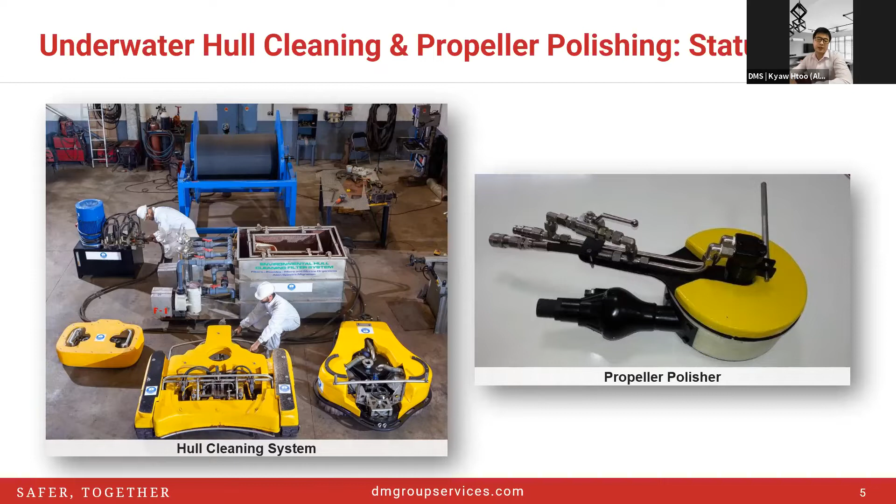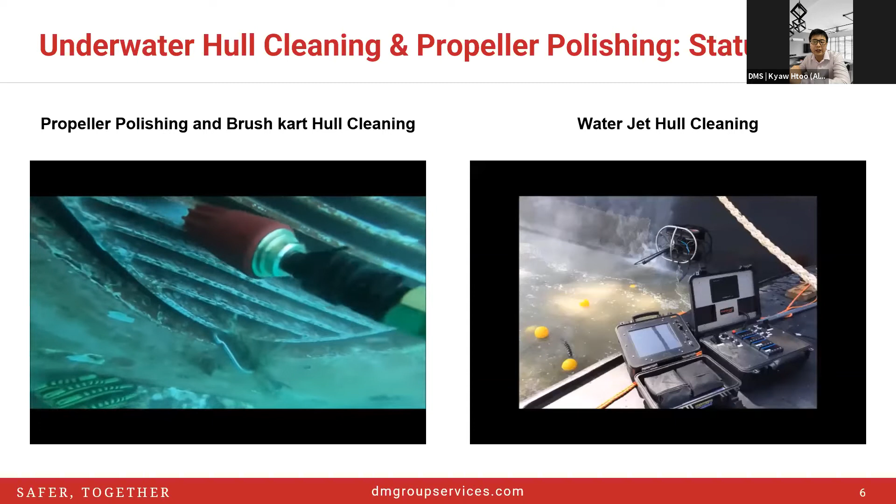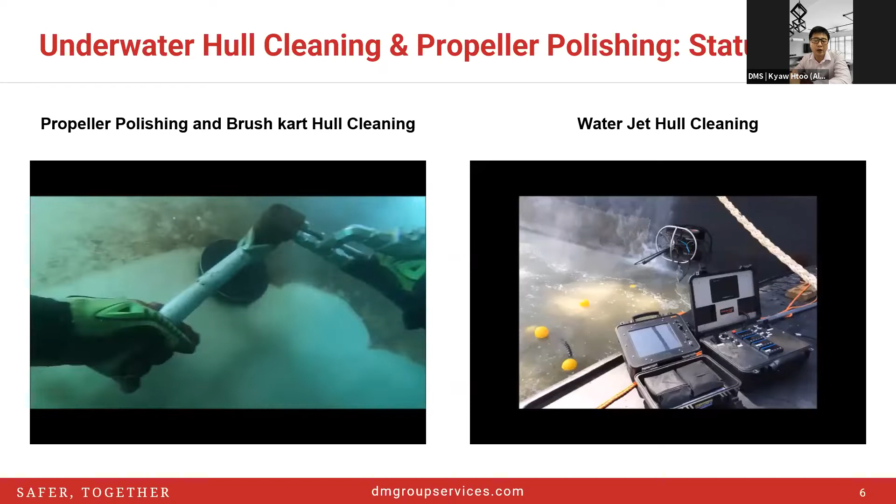This is another area where the cooling line passes through to the ships. The next step shows the actual operation for propeller polishing using the polishers by a human diver at this stage.

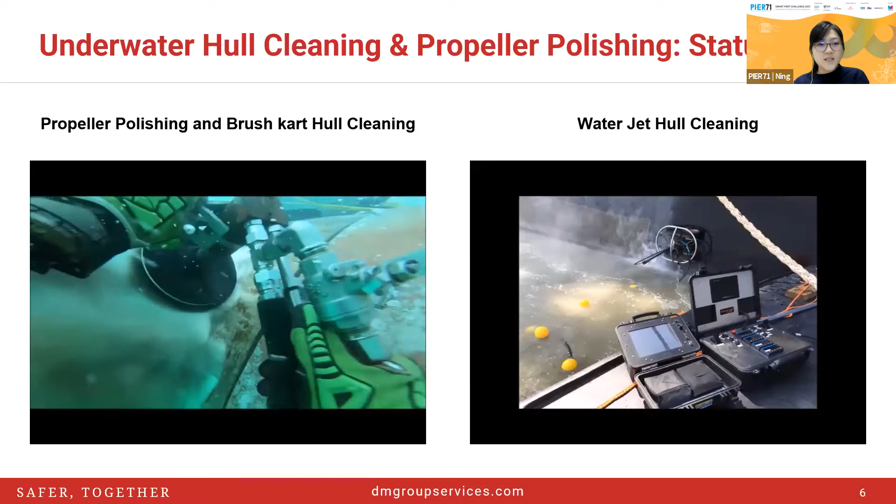We can see that it's very manual currently, right? Yes, exactly, and they need human control. With human divers, there comes precision—they can go through places and know exactly which spots to clean, and also know exactly not to damage the propellers or the hull itself. Different pressure can cause different effects, so we are only cleaning and polishing to ensure the best performance, without damaging any machinery, equipment, or the hull itself. It's a very careful and tedious operation.

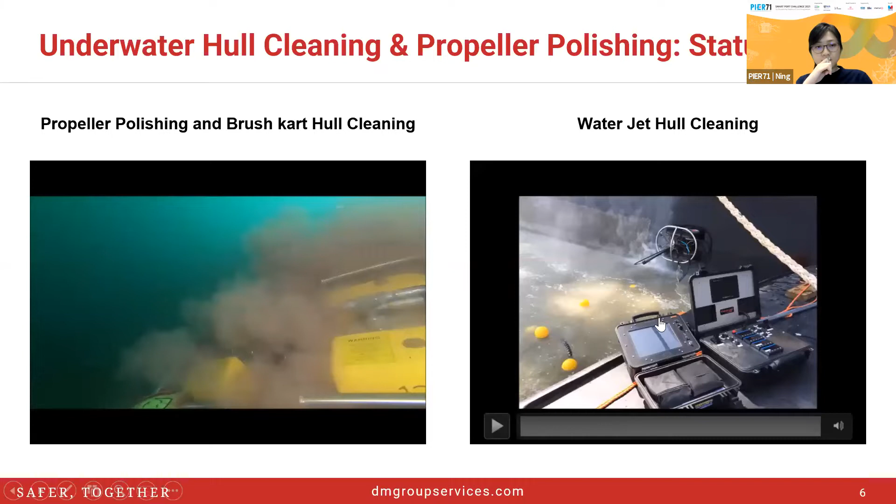The next is the brush kart, also run by divers moving through the hull. On the right, there's another type of technology using water jets for hull cleaning. So on the left is the brush kart system, and on the right is the water jet system.

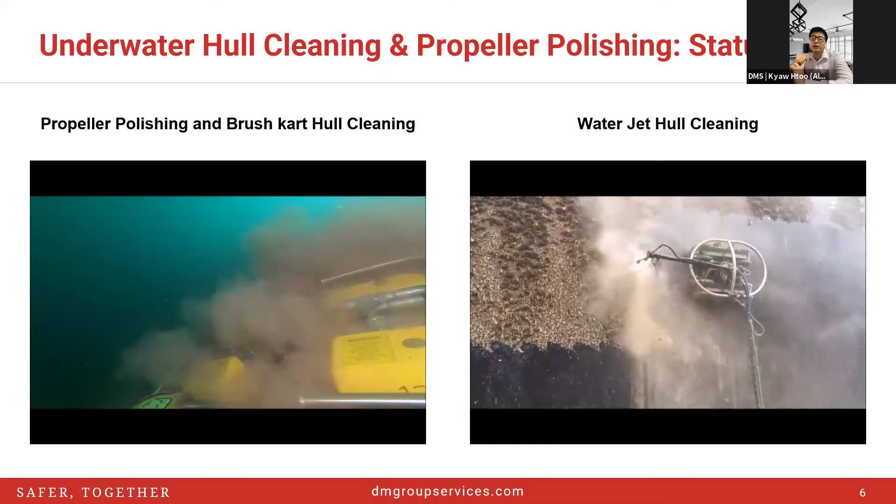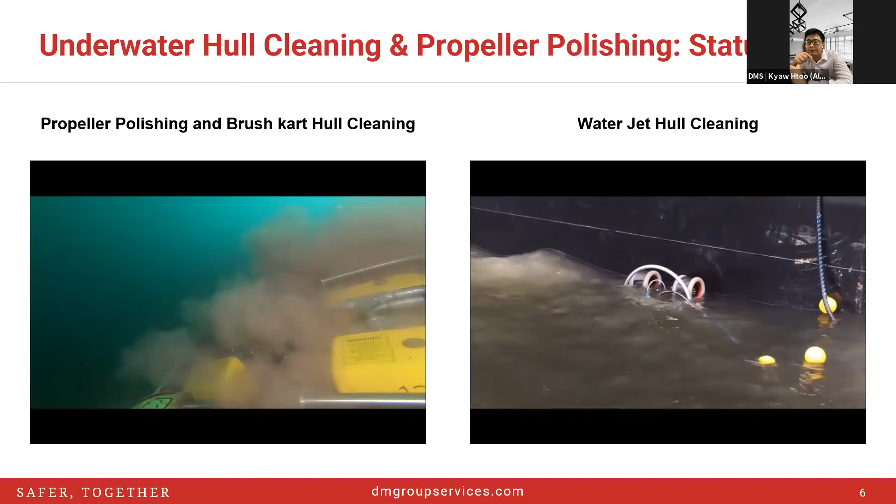This is not operated by a human, is it? This is an ROV, definitely operated by a human on the boats—remotely. There's no full automation where everybody sits in the office and the robot does it by itself at this stage. But at least the good thing about the water jet system on the right is there's no human diver involved throughout the operation; mostly he just lowers the equipment to the right place, then the pilot does the job of cleaning.

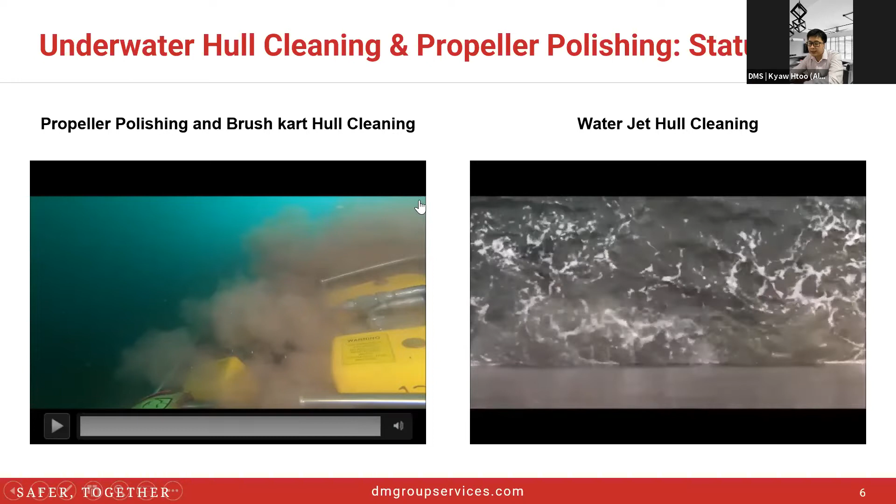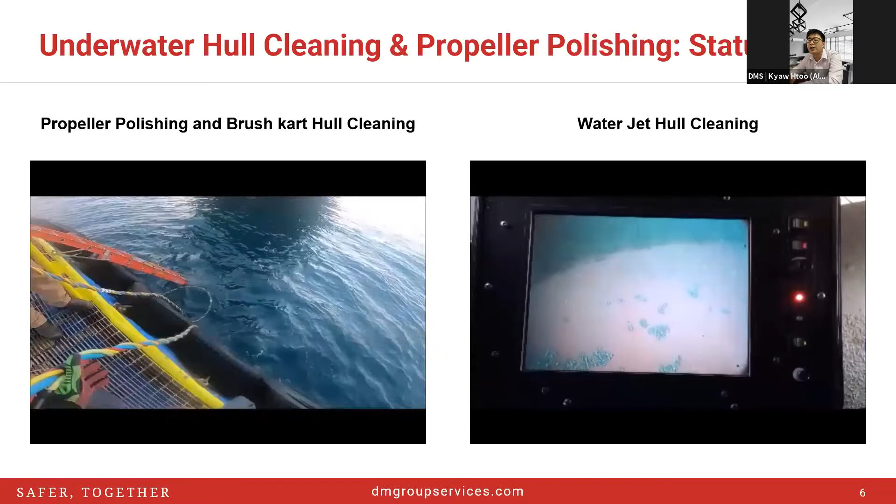I think we can move on to the next slide. After cleaning, what actually happens is that while cleaning you cannot see the proper condition of the hull. So let's go on to the next slide.

A typical challenge we've been facing is mainly those hard to reach areas that Ning mentioned previously, the bow, the stern, and all the propeller and rudder area. This is the tedious part. And of course, different fouling has different conditions, so time to time the barnacles are very hard and difficult to clean. It's also dependent on which kind of tool and brush to use for different cleaning projects.

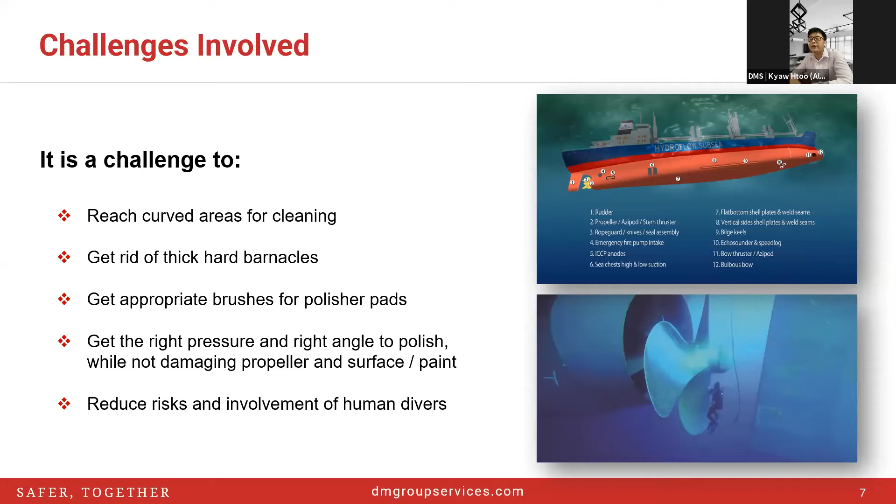Not only that, all this area, we want the best performance of the hull and propeller. The important factor we're considering for all this ROV solution is also because we would like to reduce risk and involvement of human divers, as it is a very high risk operation. So this is the current challenges we face.

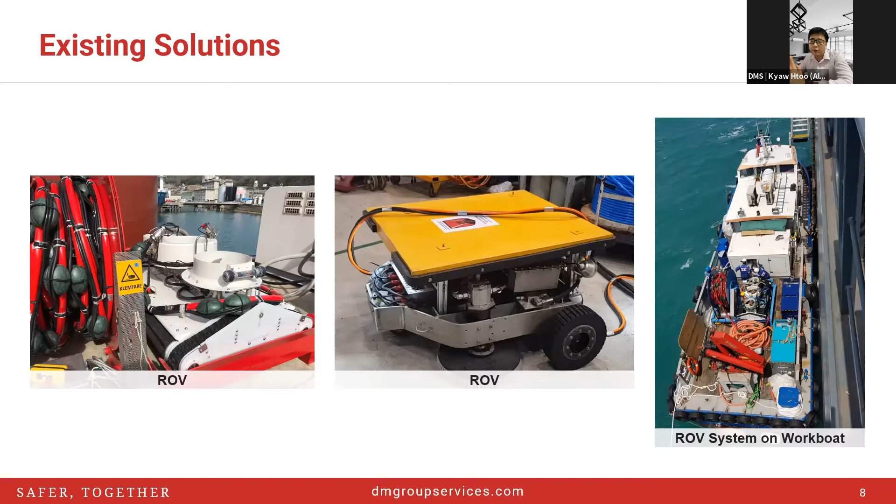Then, of course, there are existing solutions at this stage. On the left-hand side is a water jet ROV system, doing the cleaning with only the pilot operator remotely operating the vehicle. The center one is the brush kart system, also remotely operated. On the right-hand side is a full setup ROV system on a workboat. Now I'd like to move on to show you some videos on how actual cleaning is being done by the ROV.

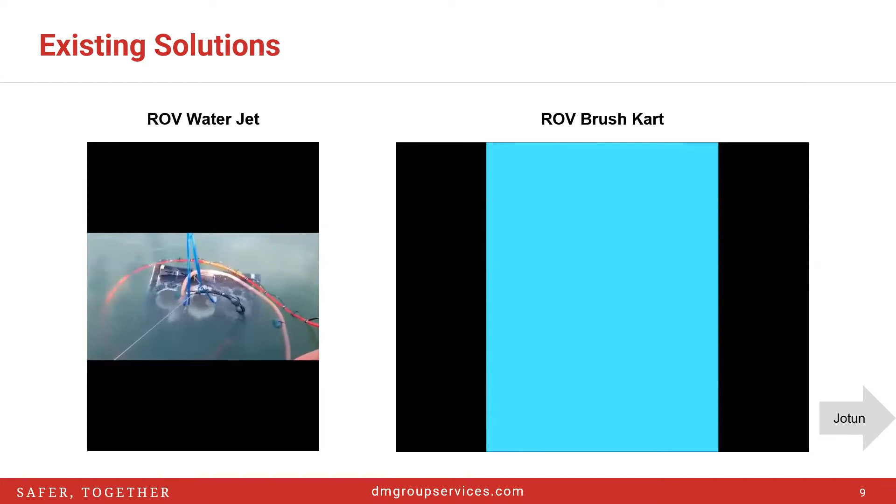I have a question. All these are underwater, right? Yes, these cleaning are underwater, nothing above water. So whatever you're showing is effective only when used for cleaning below the water surface, right?

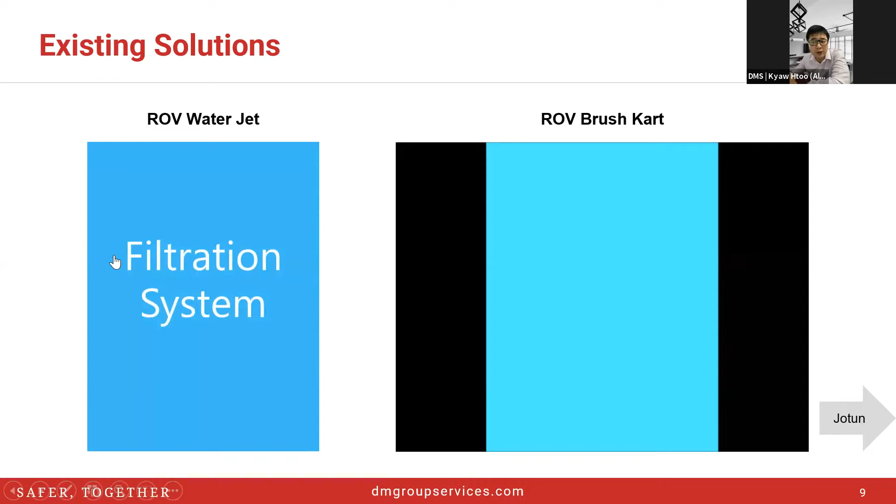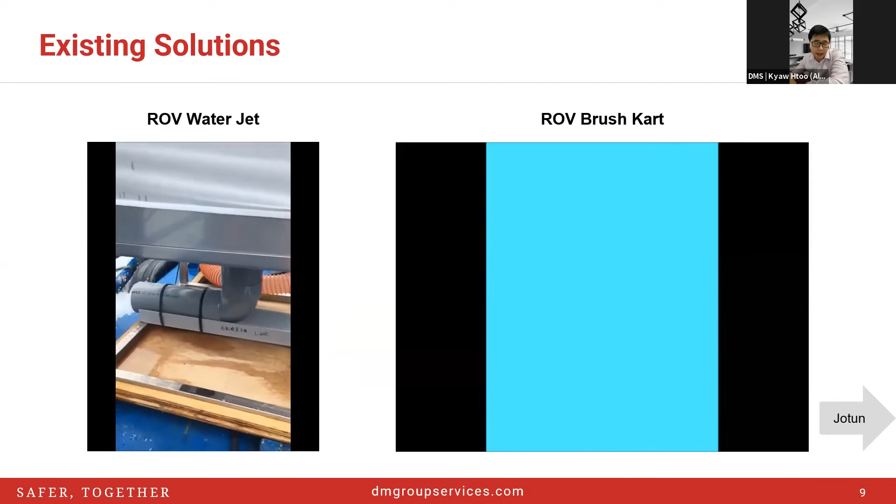Yes. But of course, there are different tools and ROV systems. Some make use of magnetic systems so they can stick onto the above waterline, so that's also not much of an issue. Other than that, above the waterline, you can even use a normal hydrojetting machine from the ship side to do the cleaning. So above waterline is normal.

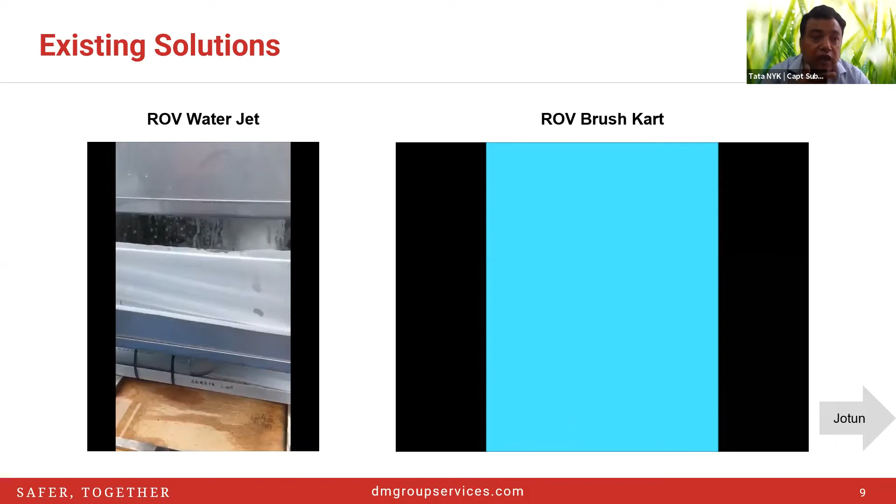So normally, what are the difficulties? If the vessel is in loaded condition, then most of the underwater surface below is cleaned. But if the vessel is in ballast, they've got a high freeboard of 8 or 9 meters, so the equipment is unable to reach that height. Maybe only 1 or 2 meters of the water level they clean. So in fact you're carrying out hull cleaning which is not 100% efficient. That is one area of concern.

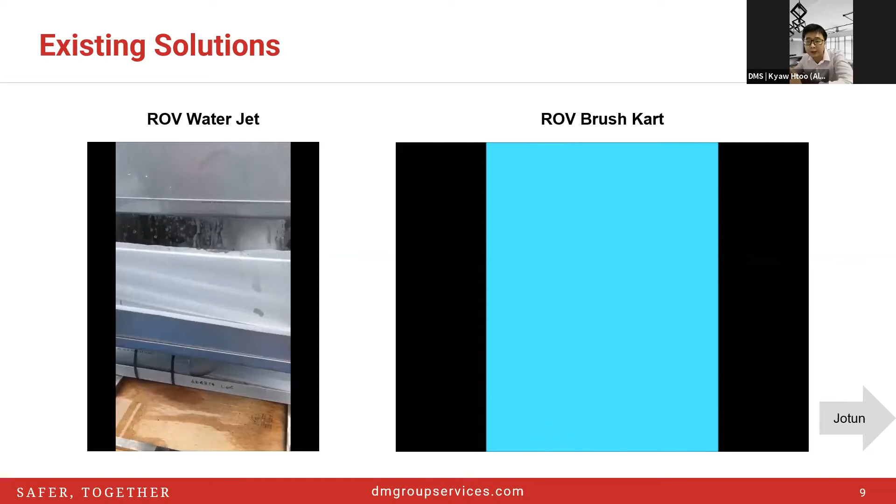For that reason, there are also workboats equipped, because this depends on the draft condition and arrangement done on the vessel at that particular point in time during hull cleaning. If you pre-highlight to the diving service company the draft, how many meters above waterline and how many below, they can arrange a different team to take care of different jobs. Above waterline can be done many ways, a simple way is a workboat alongside using the hydrojetting machine, or manually with an ROV machine. But those ROV systems with a magnetic system can go vertical and also do the job. So all this needs to be pre-communicated so that during the hull cleaning process you can optimize the cleaning area.

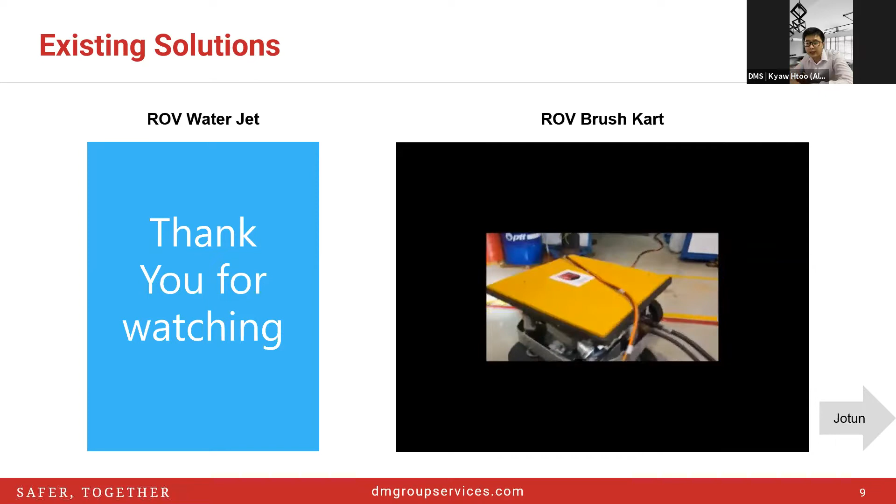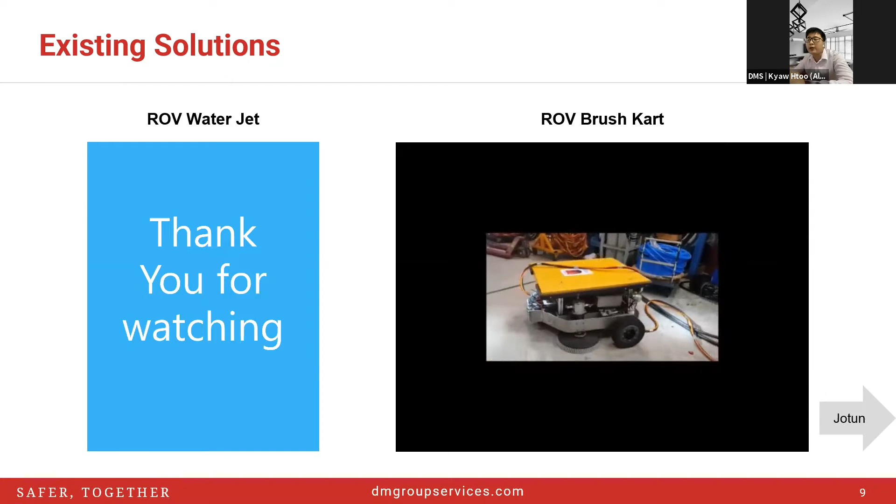This is a debris collection system where they filter all the barnacles and then discharge the seawater. On the right-hand side is another type of brush kart system using the ROV as well, remotely operated. This is only in the workshop where they are doing a trial; later the video will show the actual operation.

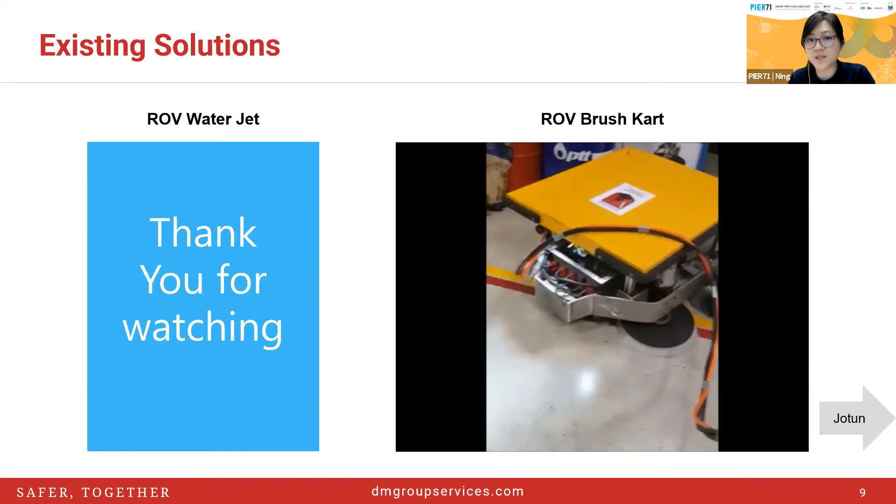But all these can only be used on flat surfaces and not really on curved surfaces, right? Yes, exactly. As you can see, the structure is quite big, so the limitation is they can only go through curved surfaces at an angle, but cannot really clean thoroughly on curved surfaces, especially like the propeller. Yeah, the propeller is a very tedious operation, so definitely this huge giant system cannot clean the propeller at this stage. We need something smaller, compact, to reduce the tediousness of propeller polishing.

Propeller polishing is something that, although the propeller itself is not as fragile as we think, it's a part you do not want to damage. So does it actually get damaged very easily? No.

If you're using a very hard brush, it can cause scratches. What superintendents don't want is any crack or damage to the propeller, because all this is subject to class survey usually every 2.5 and 5 years for a vessel.

So at 2.5 years, normally they do the in-water UWILD inspection, we call it in-water survey inspection. If the surveyor finds any damage, especially cracks or anything, they will flag the issue. It's quite major because the propeller is also part of the major component for fuel consumption and fuel efficiency.

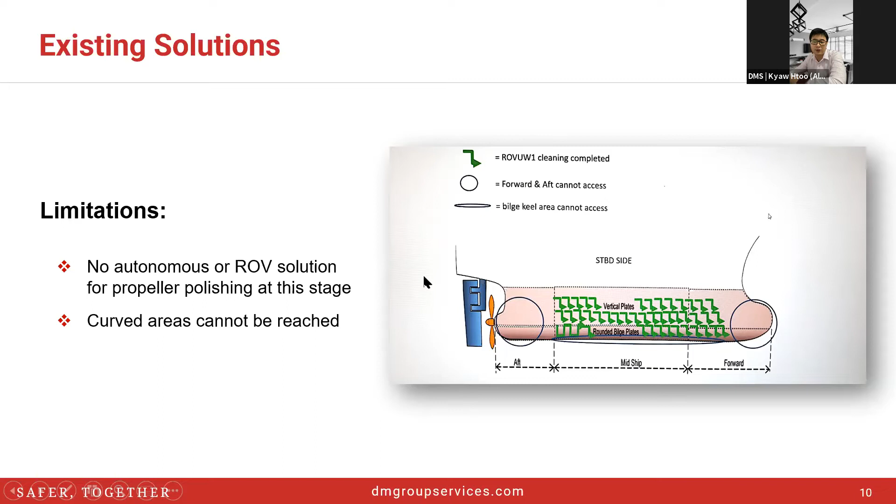So currently we have a solution. The main goal is to reduce safety risks of the operations, and second, the solution must be ease of operation and usage, definitely for all areas, curved or flat surfaces, that's beneficial. Lastly, it has to have different standards of equipment that can perform different tasks down to the very bottom.

As we discussed, how tedious it is not to damage the propeller and also the hull paint, because paint is also a crucial part of the vessel. So ship owners and managers arrange for hull cleaning to ensure the paint performs optimally, with less drag.

Ultimately, of course, it's better cleaning efficiency with minimal downtime. At this stage, some ports don't allow human diver cleaning at the terminal. So ROV can be one of the solutions, where while the vessel is doing operations on top, underwater they are doing the hull cleaning.

So it will reduce off-hire time for the vessel. Even if it's not off-hire, if the charterer is willing to pay for this, it's beneficial for the charterer because operation downtime will be less. We don't have to arrange and encourage cleanup jobs separately.

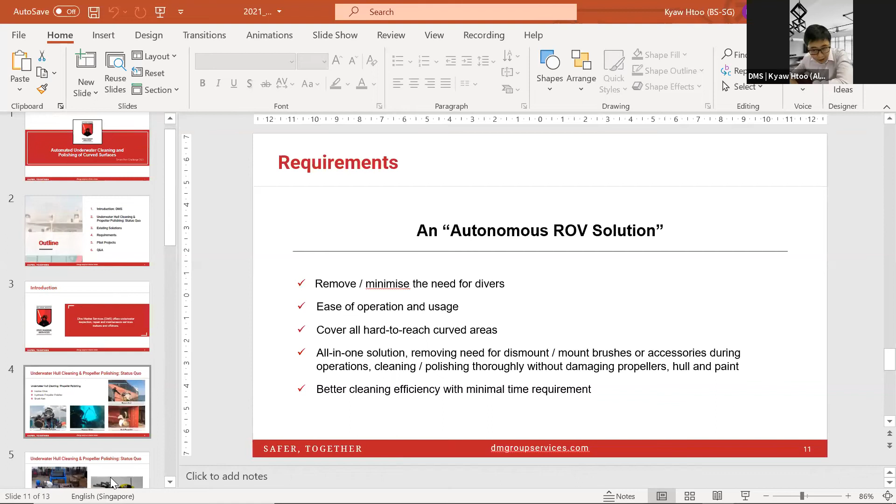Yes, correct. So in order to be sustainable, we definitely need this kind of debris collection system. Hull cleaning is done, but immediately the mechanical debris is collected by the system, and only seawater is discharged. So for sustainability and the future, whatever ROV system we're working on definitely needs a debris collection system.

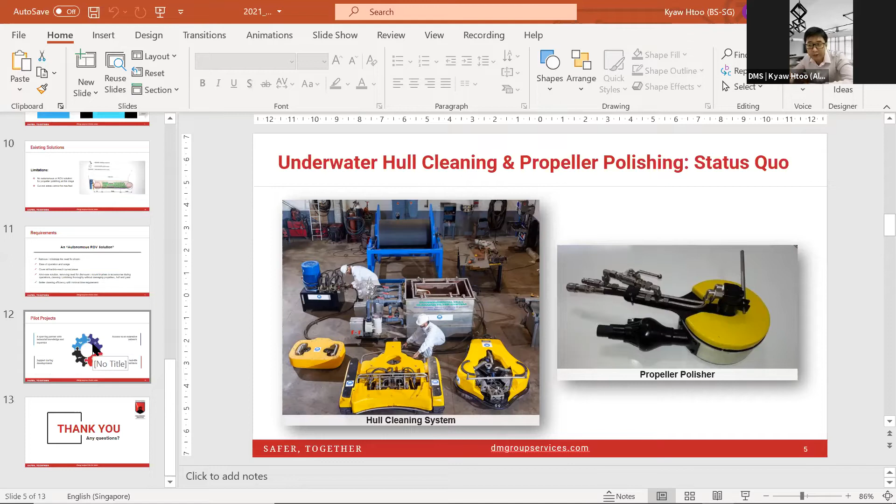Even though currently there's no official IMO regulation other than the ballast water treatment system - nothing directly affecting hull cleaning at this stage yet - sooner or later environmental regulation will kick in for this kind of hull cleaning project.

So I do have a question. It seems like this solution is looking to achieve a lot of things, although ultimately it's to clean the hull or curved surfaces like a propeller effectively. But to me it sounds like there are a lot of things to check. First, it's making sure cleaning is actually possible. So I want to ask, what is the extent of cleanliness? Let's just use that phrase.

Acceptable when you have human-driven cleaning, it's probably the cleanest you can get versus an ROV, right? So have you seen any disparity between effectiveness in using human divers versus ROVs? And would you be able to accept maybe a less clean hull if we do not use divers?

Definitely, I believe industry might not. So definitely, even for an ROV solution, it has to keep a certain standard as close as possible to the human diver. The reason being, if it is not done properly, the owners, managers and charterers still have the issue of extra fuel consumption and extra drag. So it will not serve the purpose if it's not done properly to the required level.

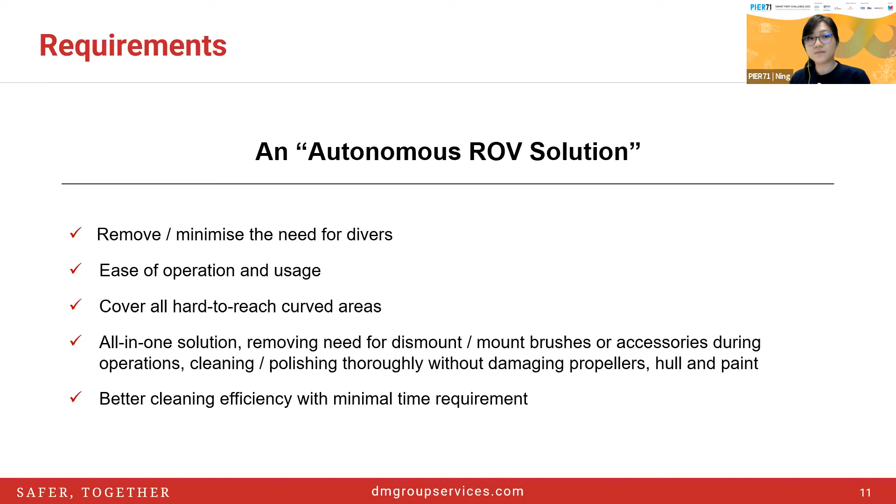Oh yeah, for this I prepared a slide as well. Definitely we can be sparring partners because as you can see from different videos, we have industrial knowledge and different expertise. Then definitely we can also support them during the development, for sure. And we do have a test bed in real life conditions.

Meaning, of course it's also subject to the owners, but we do have workboats dedicated for this kind of underwater operation, so we can always bring them on site. But of course many vessels are based on the mother vessel, owners and managers etc. There are agreements that we are doing the piloting project.

So subject to their agreement, we can do the real life testing if required. Then definitely Dive Marine Group is an MNC company, so they have access to an extensive network. And of course it's also part of Shute Group, so we have very diverse resources everywhere and network as well. And maybe to just add, we always try to see how we can collaborate between the different business units and see how they can support each other, so that we can find the right vessel to test on and so on and so forth. And that's always very helpful.

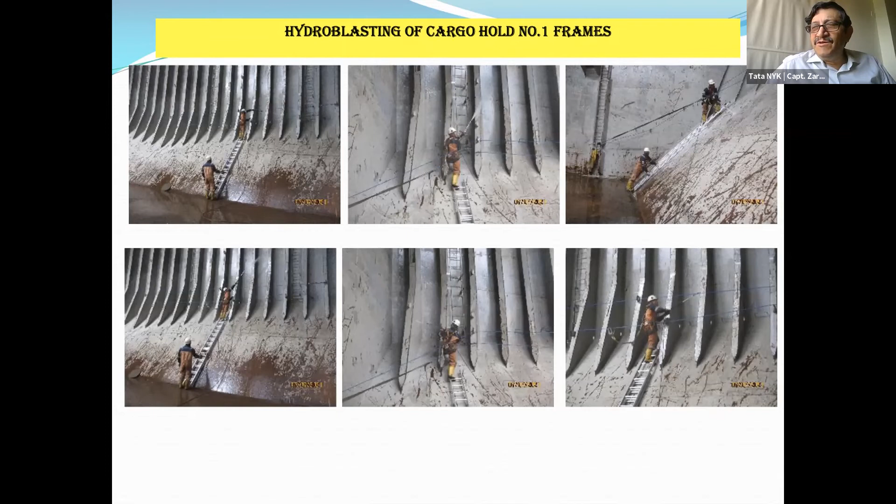It's a question of how he adapts himself to get to the job - the task is defined, he has to do it. So they're still going into the old traditional methods of water jets and scrubbing, whatever cleans up, you can apply paint, but all this takes time. You also have to ensure the person working is safe, all kinds of precautions have to be taken, and he also needs his rest hours. Can we go to the other slide also? Yes.

You can see the height of the structure, the cargo hold, which right now is empty - they're in the process of cleaning. These water jets at a particular height don't turn out to be so effective. You see there are stains on top, black marks from the previous cargo. If you carry cleaner cargoes, some charterers or next cargo owners want it absolutely spotless clean - they call it hospital clean, meaning no sign of previous cargo or any stains. But you need your ships to go and earn money, so the pressure comes on the ship staff to go back and remove all these dirty stains from the top.

So what's the dirtiest cargo picked up? You can have something like petroleum based pet coke, we call it met coke - these things stick to the sides. There's also cargo like nickel ore, it sticks there for a very long time and it's hard to take off. So you do a little chemical washing, repeatedly, and it takes time to get those stains off. It's a gradual approach, but it's very hard for someone to go up in the higher reaches. The bottom parts you can brush and scrub, or reach up with ladders, with all safety precautions, and it takes time.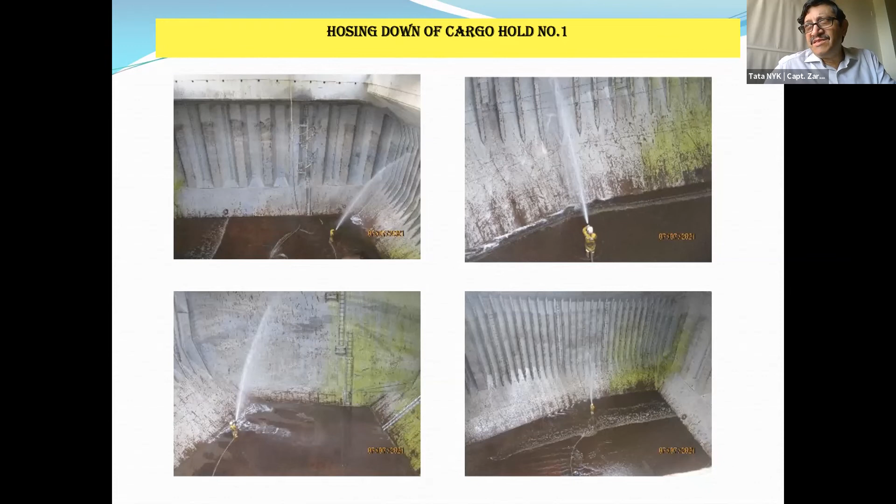With all these chemicals you use, then there are certain cargoes like carrying salt. Salt is highly corrosive, so we put an application known as a lime wash. That lime wash is a protection for the steel, and also sometimes the rust stains get sucked in by the cargo, staining it - you don't want your salt coming off the ship looking brown in color. So you have to put that protection coat of lime wash.

The next issue is once the cargo is out, you've got to get that lime wash out, because the next shipper won't accept the lime wash remaining on the cargo, although it can act like a protective barrier - you still have to remove it. So you have a double job: first the cargo gets off, you clean up the sweepings, clear whatever physical part of the cargo is there, then you have to start with the sides and remove those coatings.

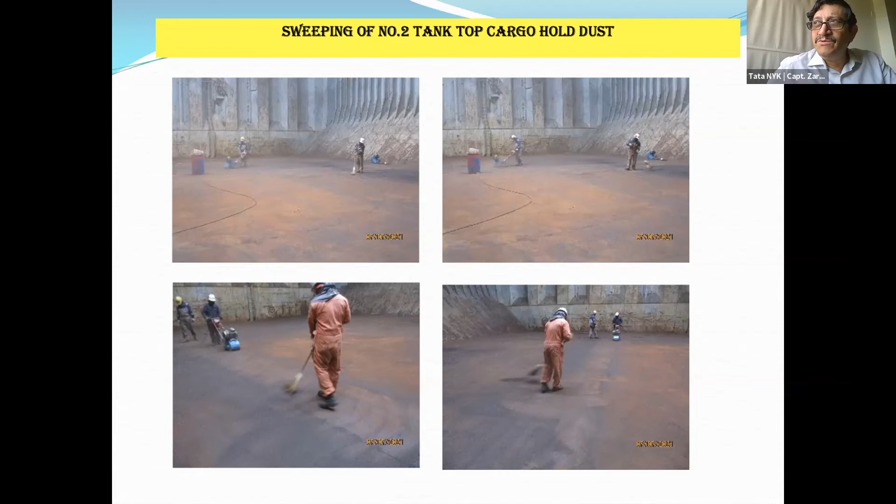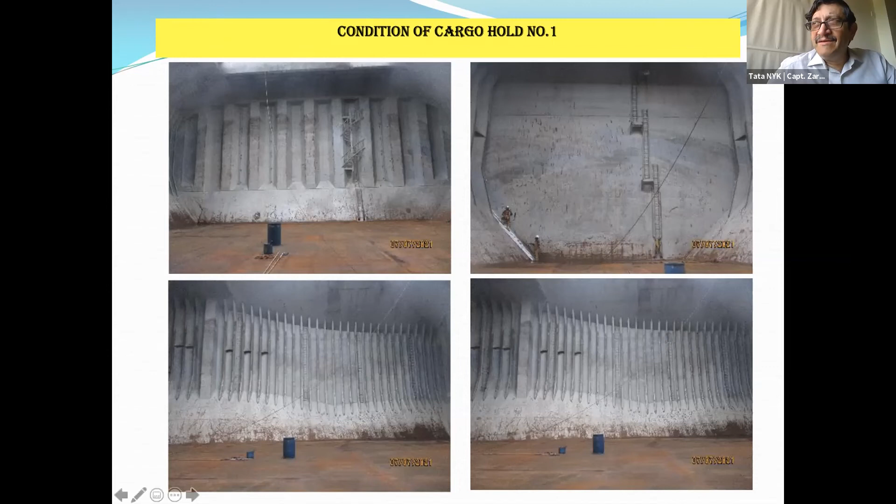There are other chemical coatings also put for different cargoes, we call them hold blocks - these are protection chemicals, but they come with their own chemicals for removal also. But in all this, it's a question of who's doing it. It's the same human being exposed to all these difficulties of reaching out, and at what level and how much time he can adapt.

This has been going on, people have been tuned to doing this kind of job, but with so much technical advancement and development, there are so many aids and methods to make things easier. It's not that you can get rid of the human beings, they have to be there to monitor how things are working, but something that can help these seafarers do a better job, and also help everyone do a quick turnaround, a fast job - we are exploring opportunities where someone can come up with a solution for us.

Definitely understand - a seafarer has no shortage of jobs to do on a vessel, whether onshore or offshore. It's just that there are things that are very manual, like cleaning cargo holds, which can definitely benefit from technological advancements. So I have a few questions: does the cleaning happen even when the weather condition is, let's say, raining? I think rain might be a problem because your cargo hold has got covers, right?

Would they have to be open for the men to go in? So if it rains, does that mean they don't clean that day? No, rain is not an issue. They can just half close, half open the hatch like a tent.

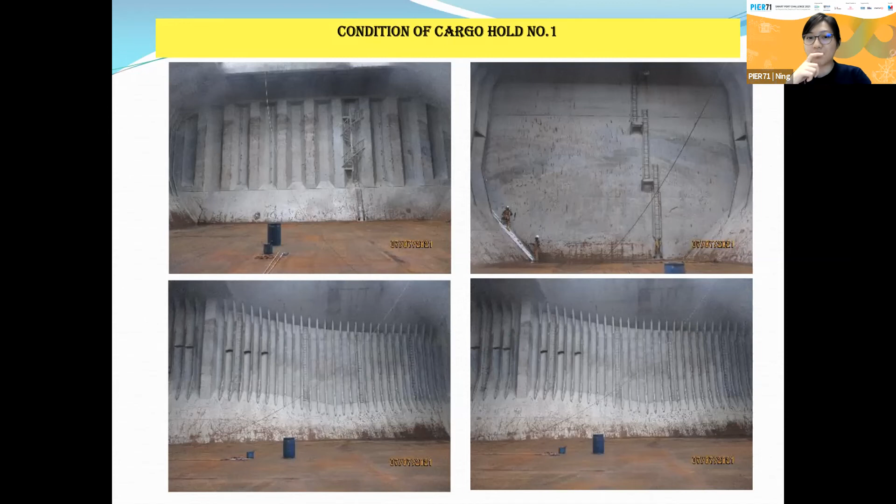Because of the items, the cargo held inside the cargo hold changes. Unlike container ships which have a pretty much fixed route, bulk carriers are slightly different - they're really pretty much on demand. They could be carrying grains from Australia to Singapore, and then once they discharge it, they could be carrying cement from Singapore to elsewhere. So the cargo has to change very often, by demand.

So that's the tough part, right? Maybe grains is easier, probably just dusty. For cement, maybe it's also dusty because it's powdered. But for things like nickel or petroleum based cargo, those are harder to clean. So the solution has to take these items into consideration. Maybe we can share some of the common cargo being handled so people get an idea of what's tough to clean.

I'll give you one more feedback. For cargoes like iron ore, if you're thinking something magnetic which sticks to the bulkhead - the vessel might carry iron ore - your magnetic solution will not be as effective because of the magnetic properties of iron ore, the contact might not be that firm. So that's another issue. There are robots available for cleaning bulkheads, but they're very inefficient when changing from iron ore to something else. That's just one feedback I'm giving you.

We have a question from the audience: what level of autonomy are you looking for in a robotic cleaning system? Gulshan is asking whether you're looking at something deployed automatically or rather assisted cleaning. It has to be assisted, because unless you can see it from a distance or it can be remotely done with cameras, someone has to monitor and see the level of cleaning, whether it's suitable, because it's a machine - someone has to watch what the machine is doing.